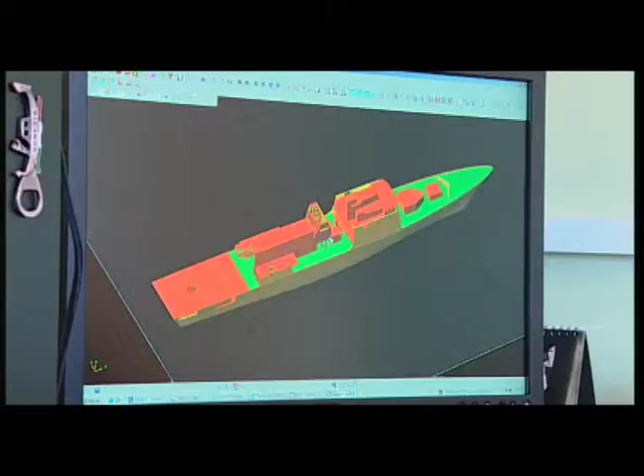For over 65 years, the Bureau has been designing the largest, the most powerful and advanced warships. Being a recognized leader of domestic shipbuilding, Severnoye Design Bureau is confident about its future, keeping the glorious traditions of the great Russian naval architects.

Our team is quite young nowadays. We have a high scientific potential and technical capacity. We are able to design any contemporary surface ship, virtually of any displacement, from a corvette to a cruiser.

At the end of the past century, Severnoye Design Bureau successfully designed and put in serial production Project 956 destroyers of Sovremenny class, Project 1155 large anti-submarine ships of Udaloy class, and Project 1164 missile cruisers of Moscow class.

Another big success was the development of third-generation ships such as large anti-submarine ship Admiral Chabanenko, Project 11551, and heavy nuclear-powered missile cruiser Peter the Great, Project 11442.

Projects 1144 and 11442 were a response to a line of nuclear cruisers built overseas. It called for new ideas from Russian developers. The naval architects managed to outline the performance characteristics of a new ship, as well as her classification, as early as at the stage of conceptual design.

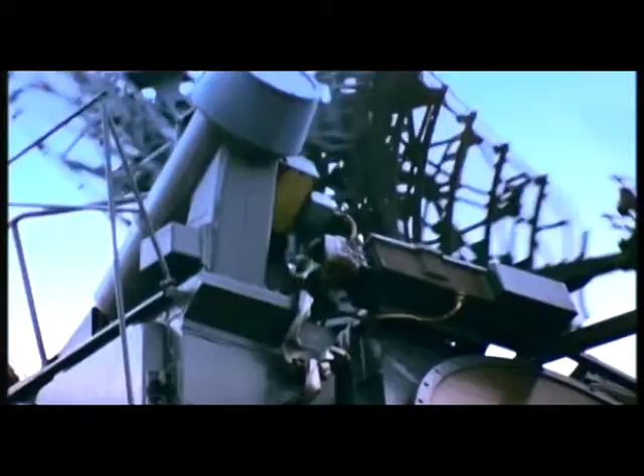However, the three cruisers that became operational with the Russian Navy from mid to late 80s were mothballed in the 90s. Only Peter the Great, commissioned in the very end of 1998, managed to maintain its operational readiness. Her length of 252 meters and her displacement of 25,860 tons provide perfect seaworthiness, great survivability, and high standards of habitability.

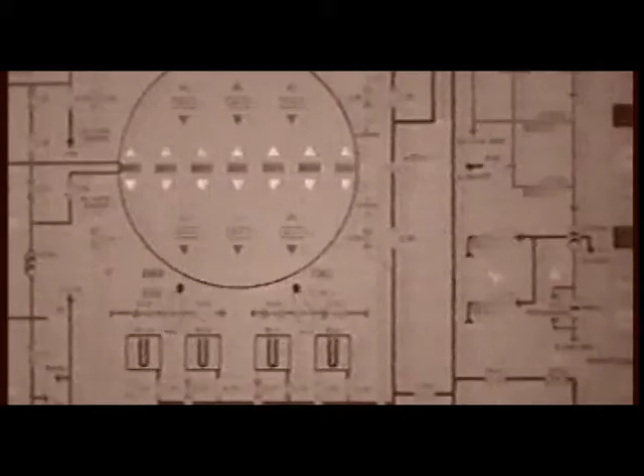The propulsion system includes 2 nuclear reactors, 4 power plants, auxiliary boilers, turbines, steam and gas turbo generators. This giant is capable of providing electricity and heat supply to an entire city of 200,000 people. And there are no limits for cruising endurance of her nuclear reactor at all.

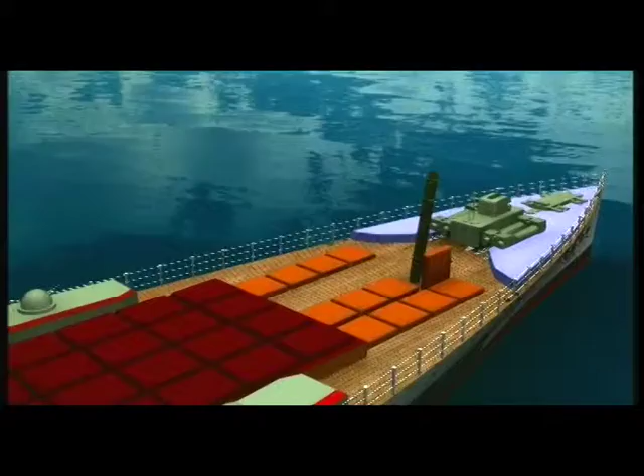The cruiser is armed with new missile systems. The S-300F anti-aircraft system and Granite anti-ship system are not only able to perform a group missile strike with target distribution in a salvo, but also to engage well-protected targets. The operational range of Granite missiles is 500 kilometers.

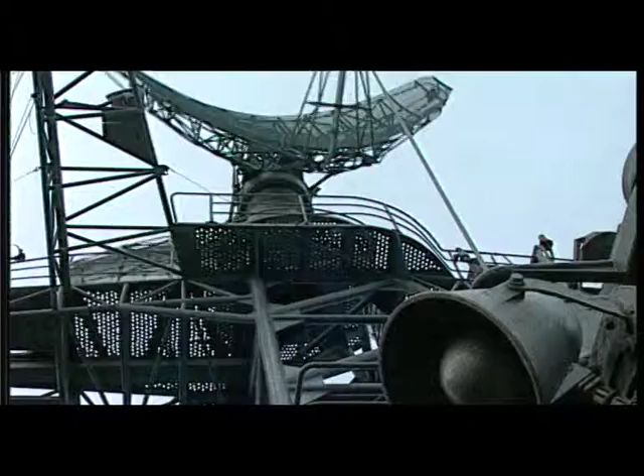Our priority is to contribute to the national security. By developing surface fleet, we develop high-tech industry. Our ships are way ahead of our time and are likely to remain so and stay in service for many years to come, at least for some 40 or 50 years.

Only 20 years ago, our country was undergoing very hard times. Difficult 90s brought a great deal of hardships for the Bureau, but in conditions of conversion, the Bureau managed to succeed in the most important task, retaining the team of professionals.

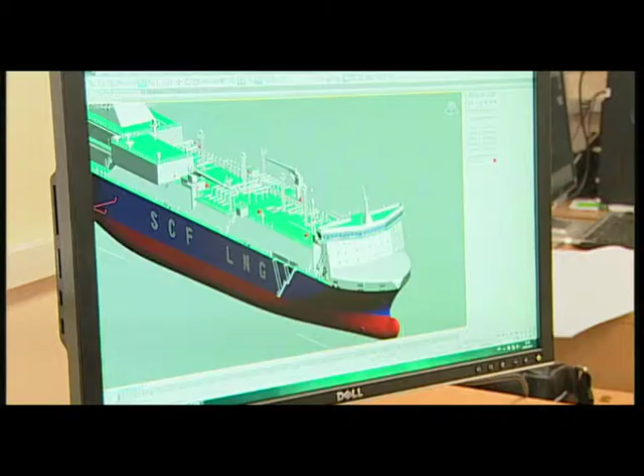Despite the difficulties, the Design Bureau made a strategically important move, and in 1997 it started to use the Foran 3D software for designing and engineering.

Of course, quality comes first. Quality and efficiency in producing documentation, facilitating the design process.

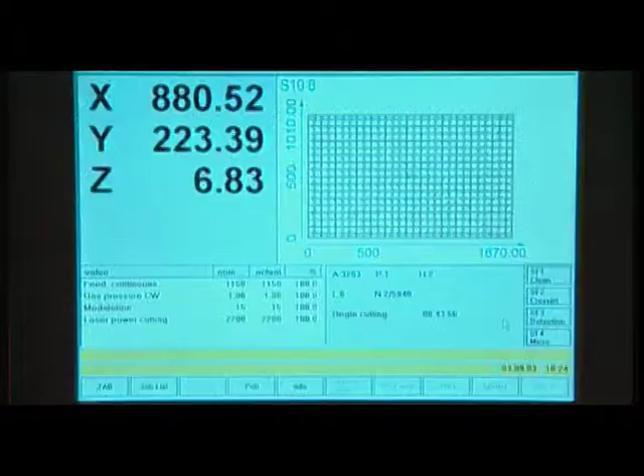Today, all the data to the manufacturers is transferred digitally, and Severnoye shipyard receives it directly from the developers. We have laid a fiber optics cable between Severnoye Design Bureau and Severnoye shipyard, and the documentation to the NC machines is fed directly from the designers.

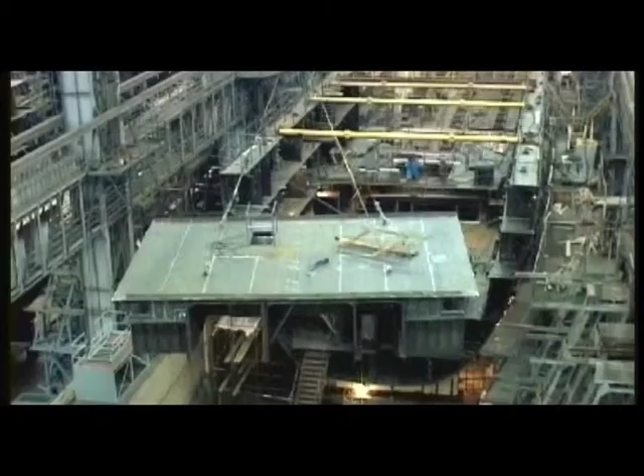By preserving high qualification of specialists and formidable scientific and technical capacity, establishing links with leading shipbuilding companies and R&D centers, the naval architects from St. Petersburg managed to rise to a new level in their growth. They successfully produce highly competitive pieces of naval materiel, timely respond to the requirements of the Russian Navy, and work to supply navies of foreign countries.

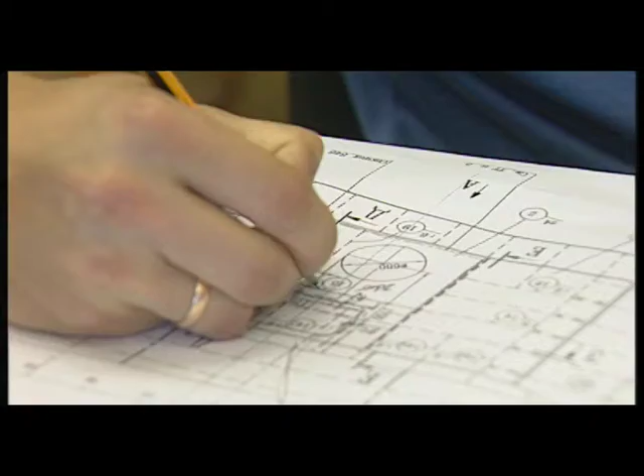We made a contract with the Indian Navy for design and construction of Project 11356 frigates. Three ships were handed over in the early 2000s, and three more are currently under construction at the Yantar shipyard in Kaliningrad. The customer highly appreciated the ships, which resulted in the conclusion of the contract. The warships are armed with the new BrahMos anti-ship missile system developed jointly by Russia and India. The lead frigate of this class was handed over to India in 2012.

The ships of Severnoye Design Bureau are also well known to the border guards. Patrol ships of Project 11351 Nerey joined the naval detachments of the Soviet KGB border guards between 1983 and 1990. The ships, based on Project 1135 and intended to protect the 200-mile exclusive economic zone, featured great seaworthiness, powerful armament, and the ability to perform combat missions under severe weather conditions.

Another project is 22460 Rubin, a border guard patrol ship built at the special order of the FSB border guards of Russia at the Almaz shipbuilding company in St. Petersburg, also intended to protect the state border. Her automatic AK-630 gun mount and two 12.7mm Kord machine guns make her indispensable in fighting terrorism and sea piracy. A search and rescue helicopter and two motorboats aboard considerably expand the capabilities of the ship, increasing her radius of operation and her ability to apprehend offenders and perform reconnaissance missions. So this ship is fast and it'll get the target anywhere.

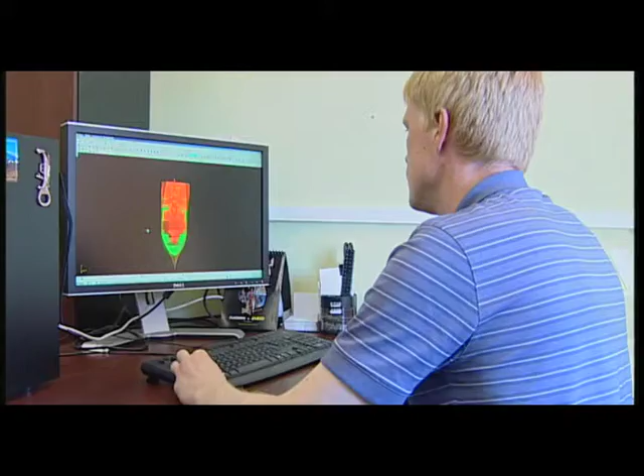The state-of-the-art corvettes developed at the Bureau, with displacement from 500 to 2,000 tons, are estimated to take some 25% of the market of light surface ships.

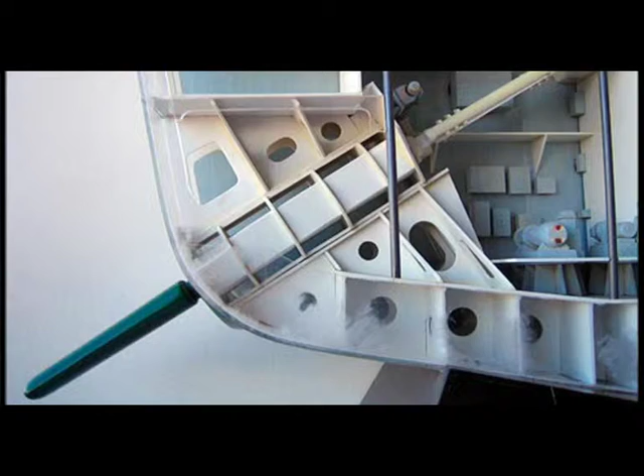For more than 50 years, Severnoye Design Bureau has been developing roll stabilizers. We are the only design bureau in Russia that designs roll stabilizers for all classes of ships. The naval architects have accumulated great experience in designing both warships and commercial vessels.

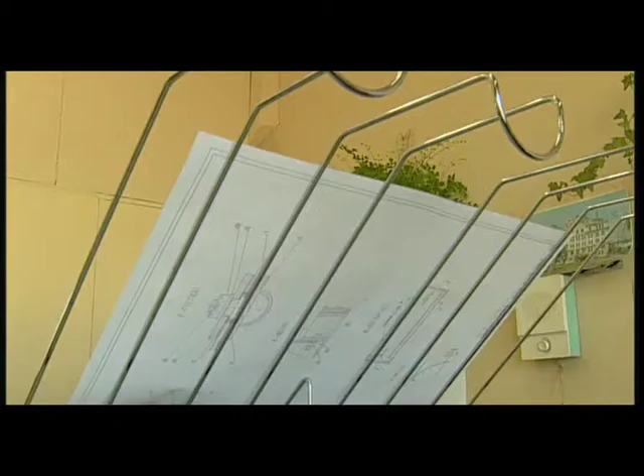That is why Severnoye Design Bureau is now one of the essential links in the structure of the United Shipbuilding Corporation, whose goal is to implement the strategy of domestic shipbuilding development. Technical documentation makes it possible to manufacture ships and vessels at yards located both in Russia and abroad. The geography of SDB contracts is quite wide: Norway, France, Germany, Spain, Korea, United States, United Kingdom, Brazil, Chile, and China.

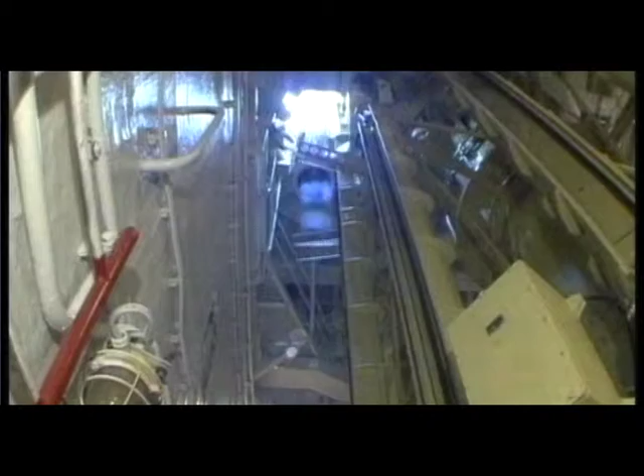With quick reaction to problems and continuous feedback from the customers, our designers develop their capacity to deliver better results. This surely reduces the construction schedule and increases the safety of ships and their survivability.

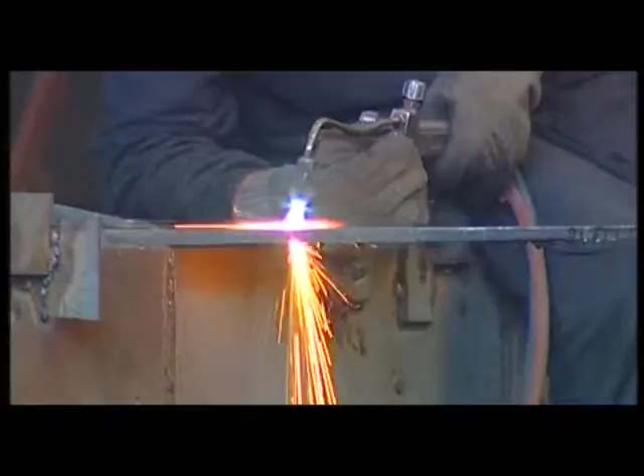New times set new tasks, and the modern Admiral Gorshkov frigate developed by Severnoye Design Bureau is unique both in her quality and technological perfection. She was launched on October 29, 2010.

What we built for the Russian Navy, like frigate 22350 at Severnoye Verf shipyard, is something that has never existed before. It's an absolutely new, state-of-the-art ship, the ship of the 21st century. Thanks to her versatility, the ship will undoubtedly replace the entire range of patrol ships and large anti-submarine ships, and she will open a new era in the development of the Russian Navy.

A few years ago, there was a maritime show in London where Severnoye Design Bureau took part. The English newspapers wrote that Severnoye Design Bureau is the best design office in Europe. That's how they define us.

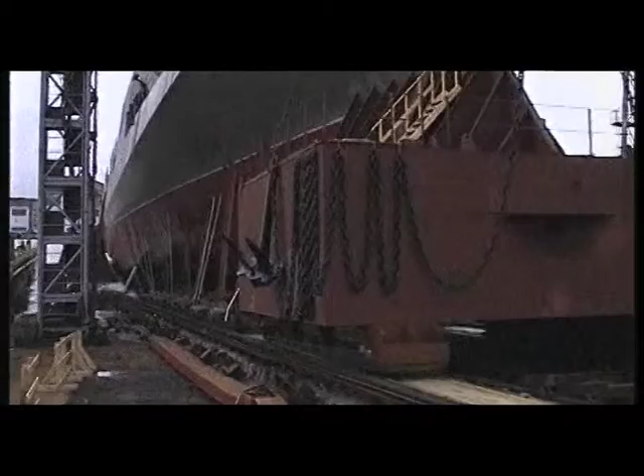In fact, even compared with other design companies, we are one of the strongest design bureaus both in Russia and in Europe. Modern Russia builds new ships, just like it used to do in the times of Peter the Great, Admiral Nakhimov, and Ushakov. Design and construction of the modern fleet is the engine that is sure to push forward the formation of contemporary Russia and help it transfer to innovative development. For a warship is just the tip of an iceberg, whose name is the technical, innovative, and industrial potential of the country.

We are good at building ships, and we know how to build them. An advanced warship designed and built to the highest standards will serve the country for more than half a century, and Severnoye Design Bureau, together with the Russian Navy, is making history right now.